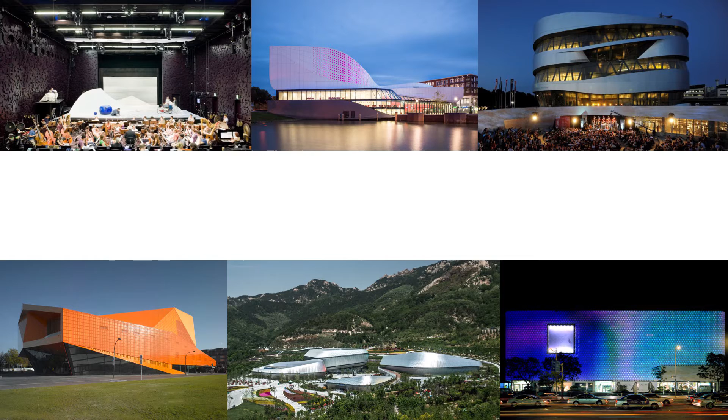So we are not strictly speaking airport planners, and most of you might know UNStudio from our cultural projects, most notably the Mercedes-Benz Museum, which you see up here.

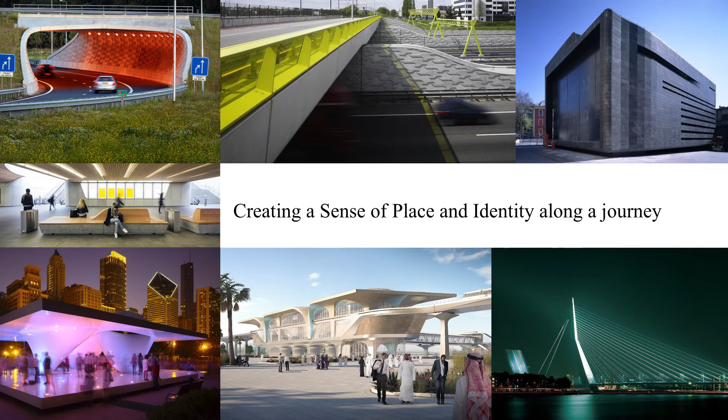But nevertheless, there has always been a keen interest in infrastructural projects in the office, and we always like the idea to take something that is considered more ordinary and turn it into something extraordinary. And by that, creating a sense of place and identity along an everyday journey.

This also changes how you perceive a city, and this ranges from a transformer substation in the city of Innsbruck that was built like a public sculpture, all the way to highway underpasses, then to bigger projects like the bridge in Rotterdam or railway stations that really change how you read a city and how a city identifies itself.

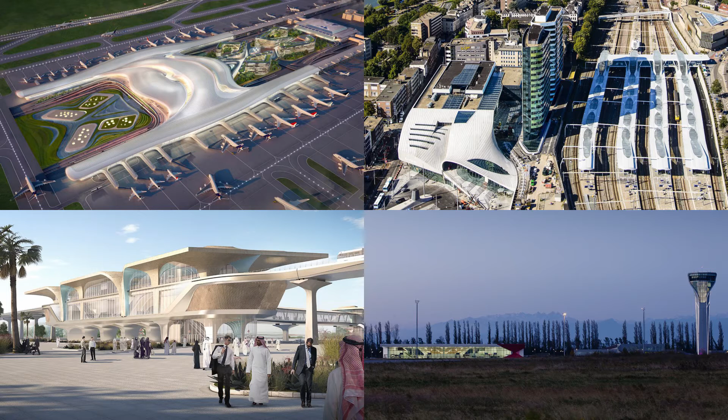In the following, I would like to look more closely into 4 projects, and would like to explain how we see user-centric design as part of our work, and the methodologies we employ at UNStudio.

The 4 projects are not only airports, so I want to widen up the discussion a bit into transport buildings. I would like to talk about Arnhem Central Station, the Qatar Integrated Railway Project, the Taiwan Airport Terminal 3, and Kutaisi International Airport.

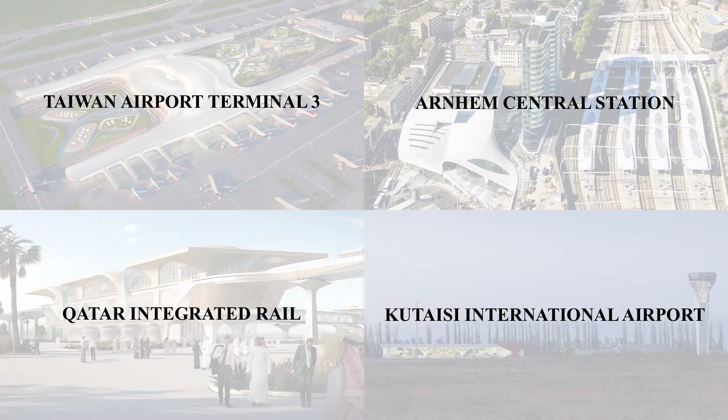So, designing a user-centric environment.

And the spaces built around this act of traveling really catered to this aspiration. They were very romantic, spectacular, and created memorable moments.

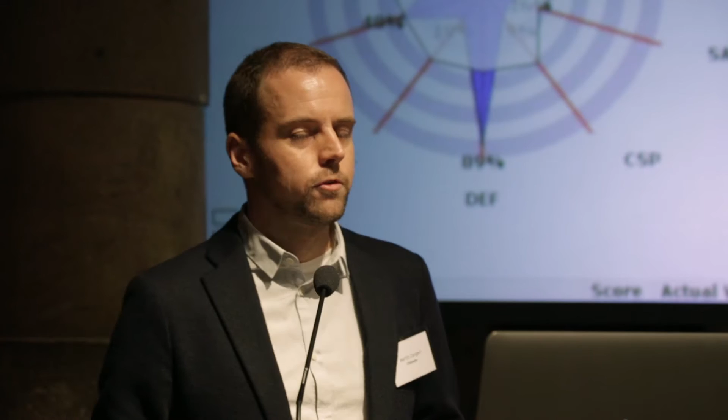And this misalignment might very well come from the fact that different parties involved in airport planning and operating try to optimize and try to be very efficient in their own field, but maybe without looking too much at what others are doing.

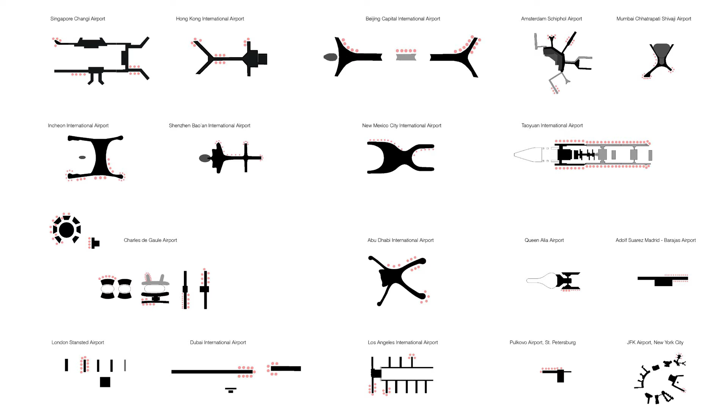Moreover, as we learned, there's an increase in passengers every year, which really affects airport planning. There are factors like size, capacity, movement rates, security areas, concessions, and so on that change with that peaking of passengers.

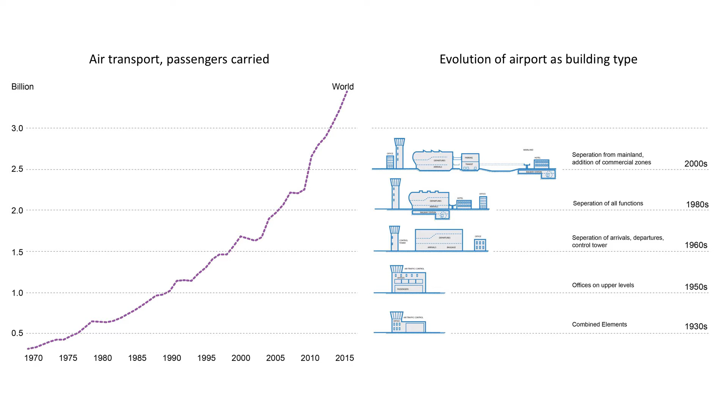So I know my numbers are not quite correct, but the graph might look like this. There's a really steep increase of passengers throughout the years, and it also affects how the airport typology changes over time. It went from something that is very small and compact and integrated into city-like areas, which are complex and very difficult to navigate.

We really believe that the difference comes from focusing on user groups and developing our design from there. We'd like to shift to a process that is more bottom-up than top-down, putting the human scale in the center. We believe this leads to a more socially sustainable and environmentally friendly way of traveling.

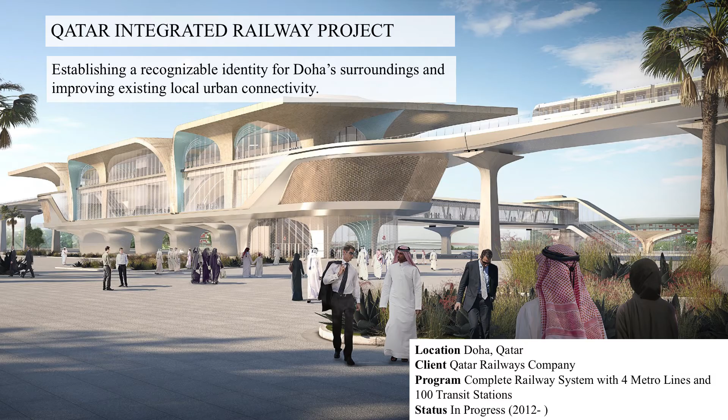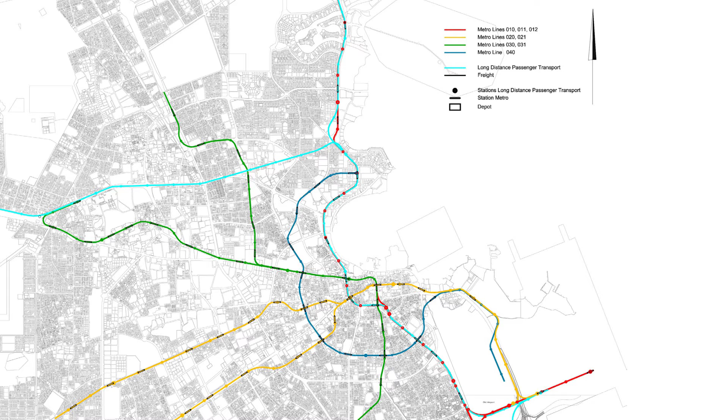The challenge in this project was that we had to design each line and every station along each line at the same time—around 100 stations, all done at once. So the question was, how can you give identity and a unique sense of place to something growing so quickly?

What we tried to do is avoid repetition and doing the same thing over and over. The solution for us was to structure the task into families of identities, meaning each station gets looked at from three different levels.

There's the location of the individual station itself in the city, which changes and is unique everywhere. But then, how does this station relate to the line it's situated in? So it's part of the red line, the blue line, and so forth.

And the next level is, how do all of these stations make up a character that is unique for Doha and represents the metro line company?

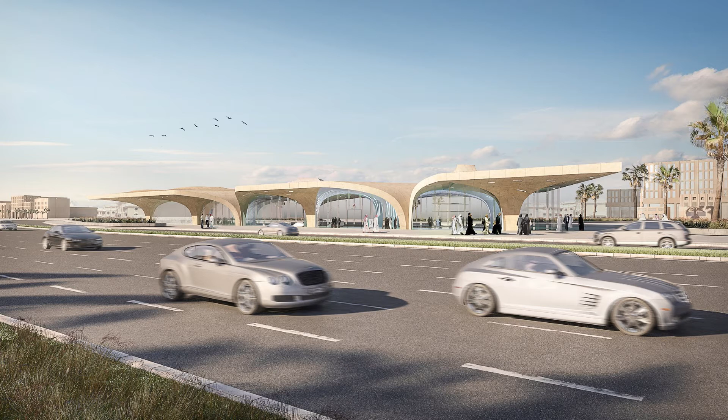What we did is start by creating an architectural language that reaches across all these scales and acts as a backbone. You see we borrowed from traditional Arabic architectural elements.

You see these arching walls, but also we tried to react to the local environment with large cantilevering roofs providing shade, and very massive roofs to keep the heat out. What you see here is what we call a pop-up shelter next to a busy road—you would enter there and then go down to find your train.

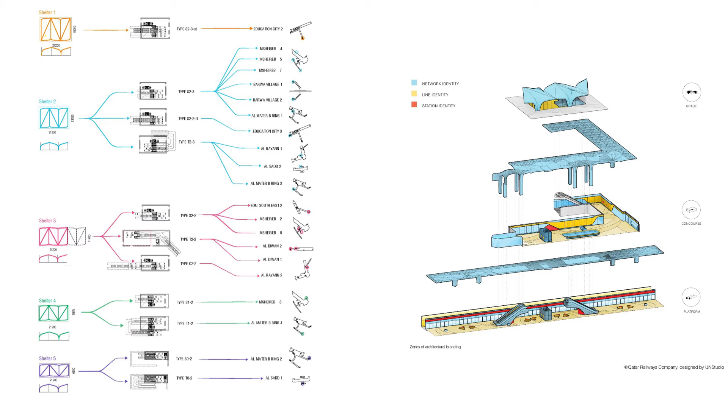By creating this language, we took great care to allow enough flexibility and variation, so we can cater to each unique situation we might encounter within the city.

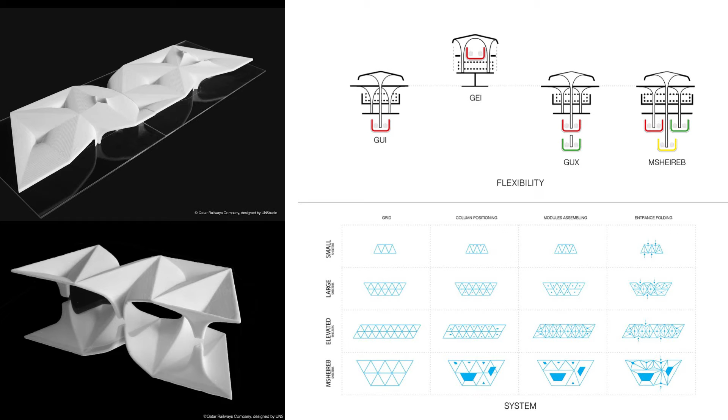What we did is create these folded panels you can see here. By combining these panels, we can build up different situations for underground stations, for shelters, for elevated stations. This almost geometric tool set allowed us to control scale, light, and—very importantly—shading in this area, while also guiding people.

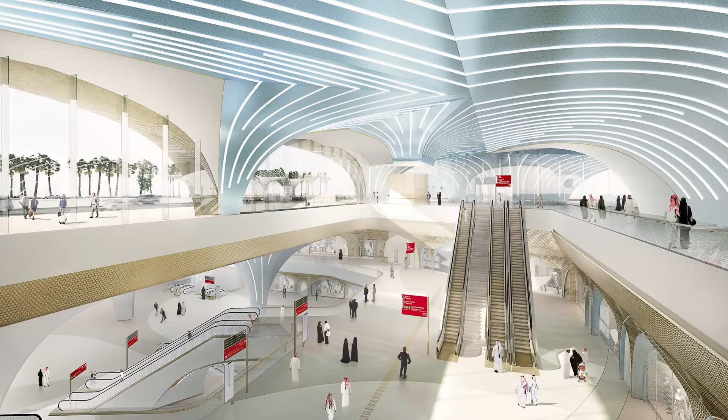And this is the station you have seen before. When you enter, you would go down and find your train.

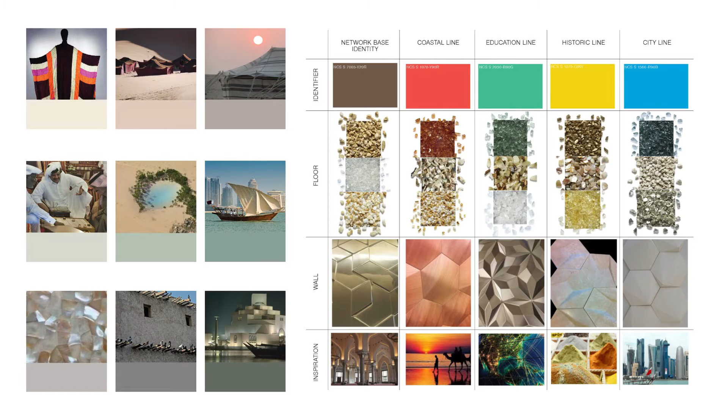But as we progressed on this project, we soon realized that to make a journey very tangible, you need to go to a different scale—areas that are closer to the user. So we started looking at the surfaces very close to you and investigated an abundant use of materials, quite unusual for stations.

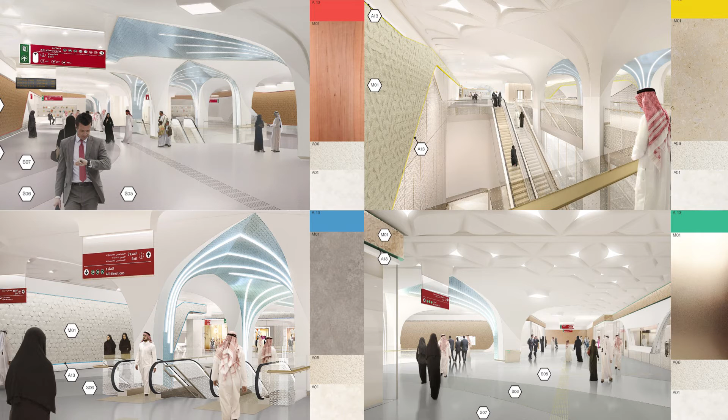Traditionally, you would have bold colors all over—your red line, your blue line—running throughout all the lines and stations. But we tried to flip this around and put materials in the foreground, working with the material properties and textures that occur naturally in these materials.

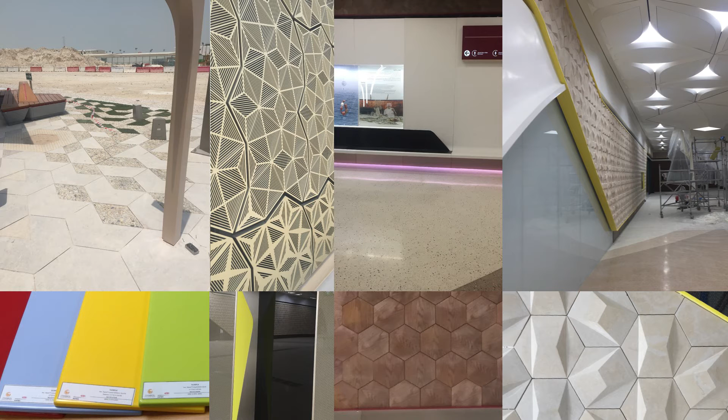So you see here, you still have your red, but the red line is very much defined by the wood material. Or the yellow line, where we use natural stone cut in a certain pattern.

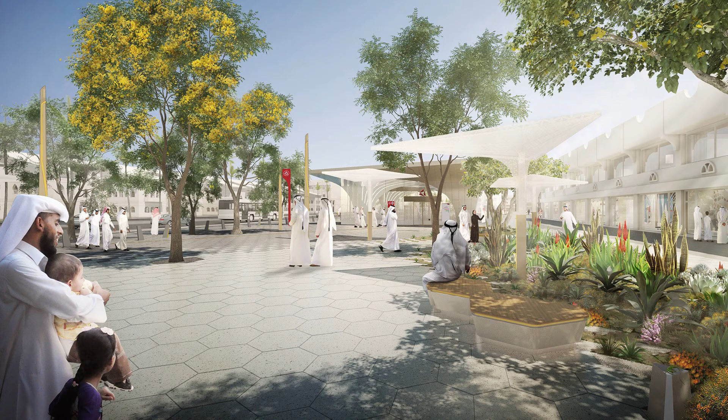We really think that by this, you can create a more friendly and pleasing environment while traveling throughout the city. To sum up this project, I think this image really captures what we were after—we believe architecture should act as a background to activities that can happen in the city, creating a sequence of spaces that let you experience the city along the way.

The quest to create more than just another train station or piece of infrastructure really relates back to this project, the Arnhem Central Station. It was completed last year and was in the office for the last 20 years.

In many ways this project acts as a model for how UNStudio works, and also for a model of what a train station can be. It turned out to be an intermodal hub that is a catalyst for the city of Arnhem, but also connects the city to the region of Gelderland, where it's situated, and to the wider geographic context.

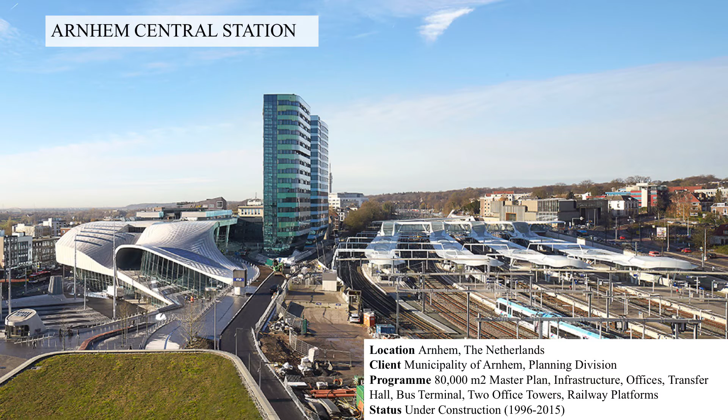Just to explain what you see: you have the main hall here on the left with the bus gates, office program here in the middle with auxiliary program, and then here the train tracks and the roofs.

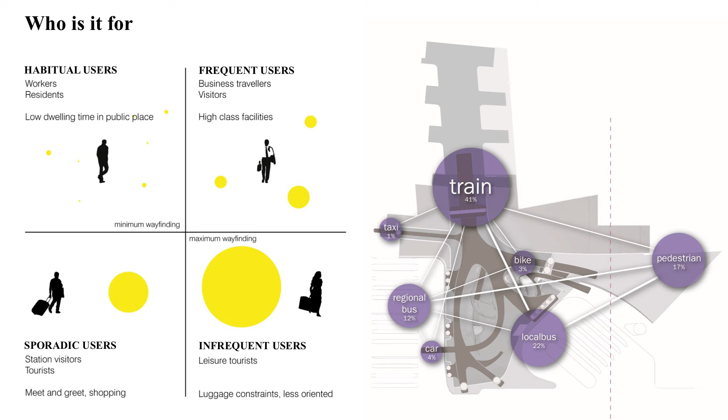This design really came about by the question: who is it for? We put the user at the core, really at the core of the consideration, and it helped us come up with something completely new. It also confirmed that the station is heavily used for travelers, but there's also a big amount of people who don't necessarily use it just for stepping onto the train.

So what we did is we took what you have in a station in abundance, movement and people walking around, and we tried to embrace this movement.

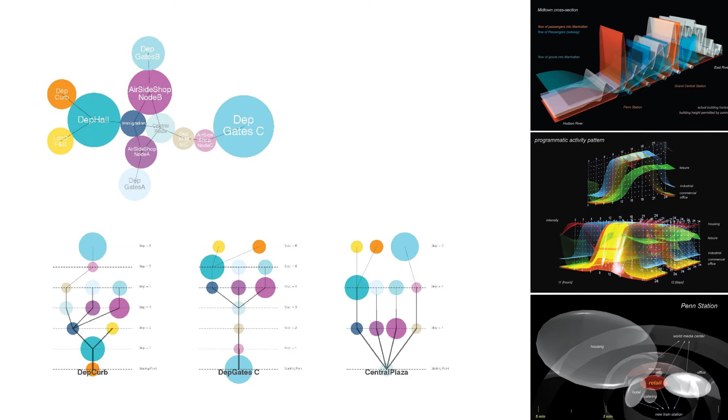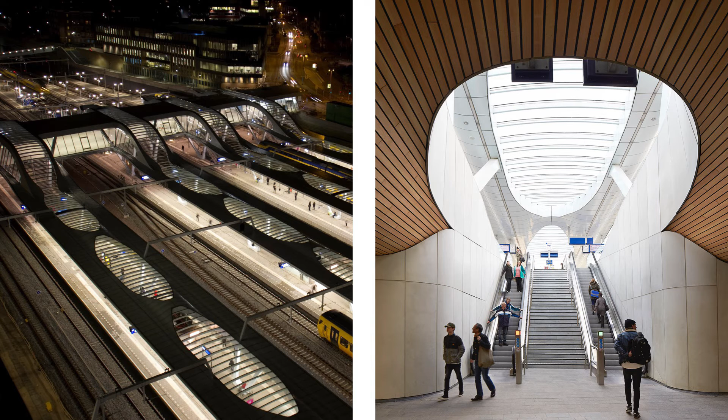In the beginning, what we always do is work with tools like this, where we start to map connections, try different scenarios, and really find the fittest of these scenarios in order to minimize decision points, level changes, and so on. We take layouts and virtually simulate the journey you go along, trying to negotiate between different destination points. In the end, we really see that architecture becomes the guide that navigates between these movement patterns we recognized in the step before.

Here you see the architectural gesture of how you come up to the station, to the tracks. You have light coming down. We are really after creating these beacons of orientation that confirm you along your way.

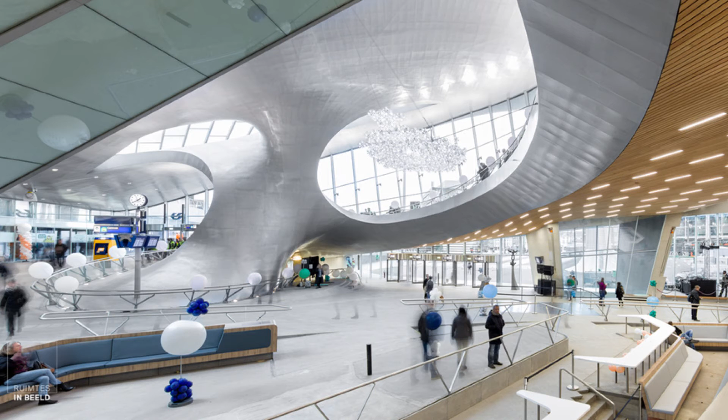This is a view into the central hall. When we look at it, we of course like the form, but it's not only the form we like—it's also a manifestation of the movement. This form really comes about from all these patterns, and we try to negotiate between these movement patterns.

So you have this long arching ramp that goes down from level 1, connecting the platforms to level 0, where you come with the buses and walk in. Then it ramps down even further in a gentle motion to the parking garage, where you come with your car, or to the bike parking facilities, which is a big thing in the Netherlands.

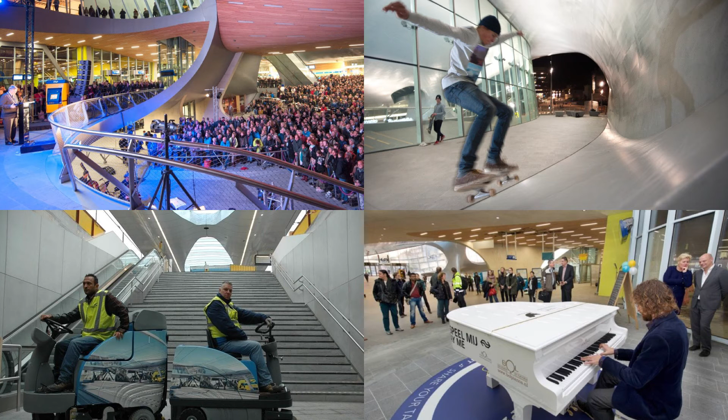There was a lot of doubt while realizing this project, but you can really see that it works when you see how people use it in unexpected ways. They make it theirs by coming up with different ways of having fun in the space, really making it personal along their journey.

Now I'm getting into airports. The airport we did, which is a realized project, is quite a small airport. But sometimes you have small projects, and in small projects you can see very well what the intention is—you can read really clearly what we are after.

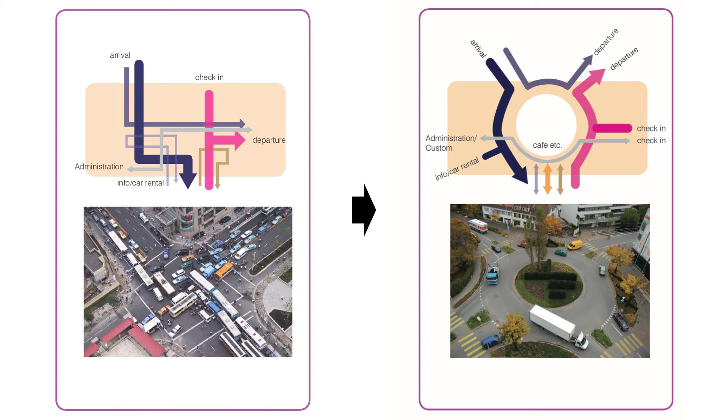It has a small capacity, nevertheless there's a national and an international separation. Everything is organized on the same level, and I think this image talks for itself. We have arrival and departure on the same level, but what we are after is quite similar as what we did in Arnhem. We are after a model of movement.

So we try to come from something that is very complex, but very inefficient and crossing, to something that is as simple as a roundabout.

And again, we use tools. We always go back to a tool set. And one of these items in the tool set is called the deep planning approach. So we start with analyzing spatial requirements, mapping out connections, physical connections, visual connections, connections with light, green.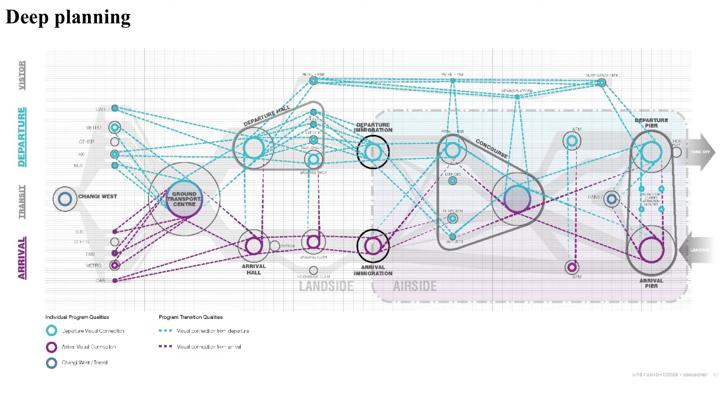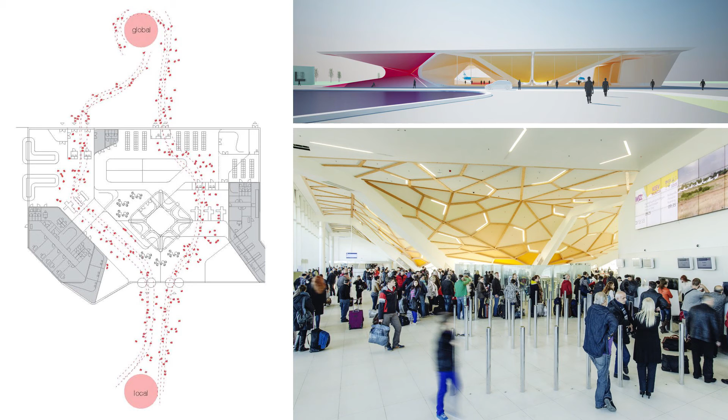We try this analytic approach to discover underlying key factors. And in this case, the key driver that drove the organization of this building is the folding roof and the courtyard that really is at the center of the building and acts as a beacon of orientation. And departures and arrivals is oriented around that central space that lets light in and has a very strong imprint.

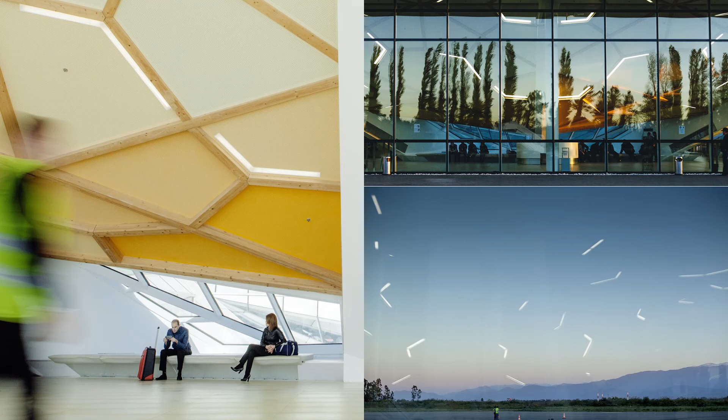And we really hope that by creating these moments that have this strong character, you start to take this picture with you along your journey, and it starts to create a memorizable place.

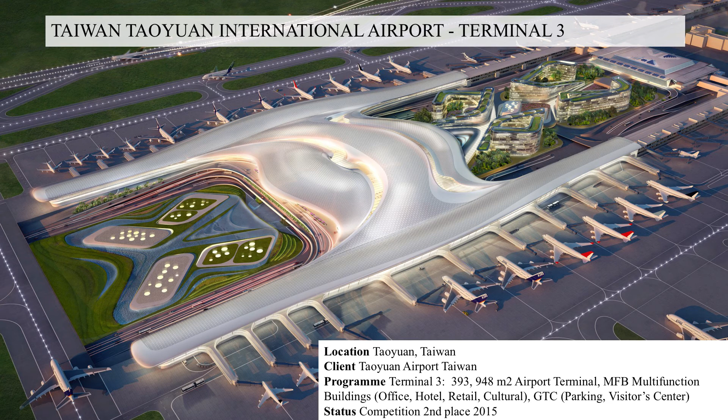So I'm finishing up now with the project that we did recently. This was a competition entry for the Taiwan International Airport. It's an extension to two existing terminals, and it is a head house with a capacity of 45 million passengers per year that can be processed in there.

And our design got second after Rogers, but we took away very positive feedback, not only from the client, but also from the jury, and even the public was very in favor of this. And it confirmed us that we are after something that might be worth taking on.

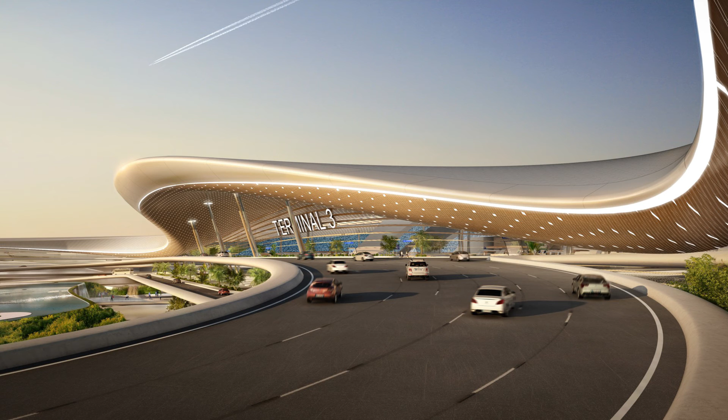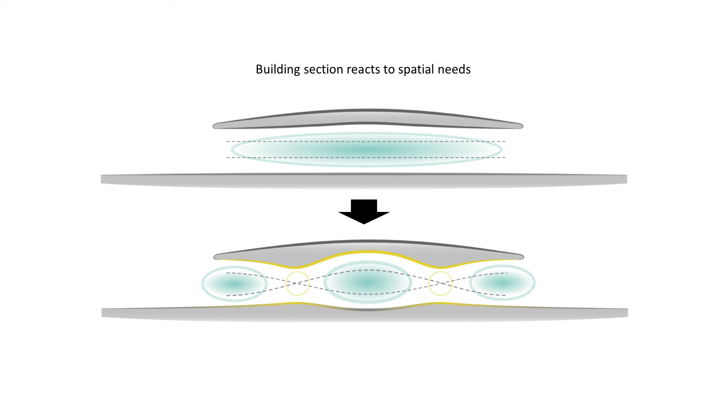We try to break with an airport typology that relies on an excessive and monotonous use of space, but try to really focus on the scale of the user. And how we did that is by adapting the building volume and changing the scale that is emotionally and functionally needed.

And by that, coming away from a big hall, but to something that is more like a link of a chain of events. So you have different sorts of experiential spheres that are linked together.

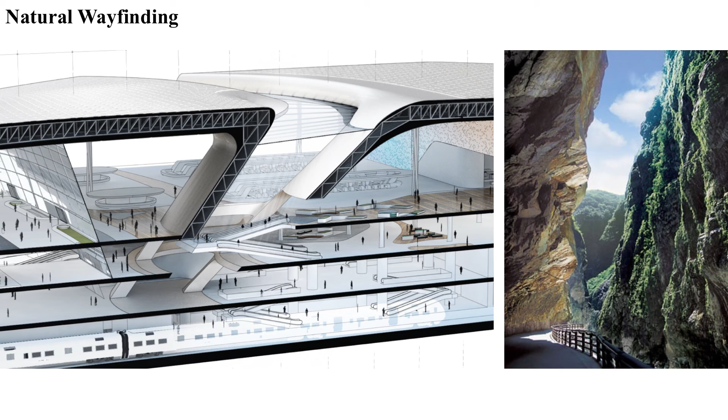And this is an example where the roof dips down. It's funneling natural daylight across the departure arrivals hall down into the MRT station, and it acts as a natural wayfinding beacon and connects all these different modalities.

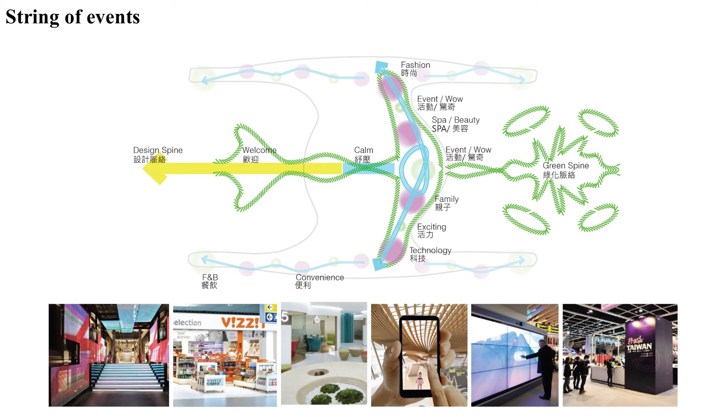And as said, we were after a curated chain of memorable events. So when you pass through this building from departure to your gate, you go along these different spaces that we set up.

It's almost like walking through Venice. You go through one piazza to the next, and hopefully you don't get as lost as in Venice. But it's the feeling that you have these very intimate spaces.

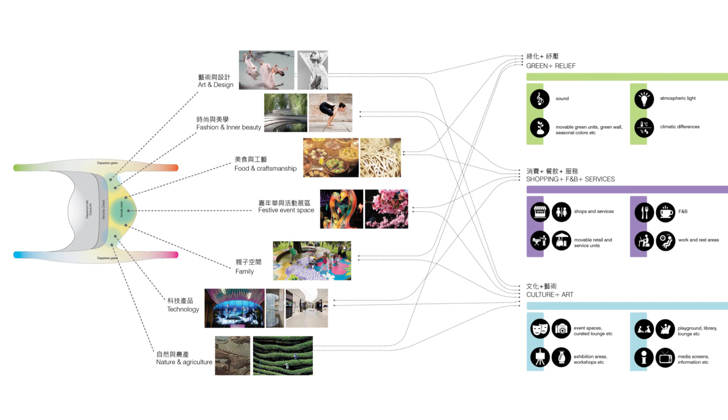That you're going through. So for each link in this chain, we introduced soft building blocks, as we call them. And they comprise of green, of shopping and services, and culture and art. And we scaled these components to what we thought emotionally needed and also functionally needed.

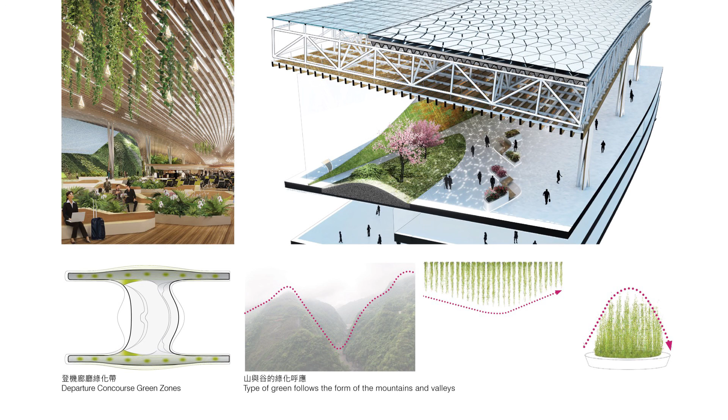And this is how one of these zones looks like. You see that it is a very natural space. We thought of them to be very relaxing, a very controlled use of daylight, controlled humidity, very controlled temperature, everything that is close to the five senses.

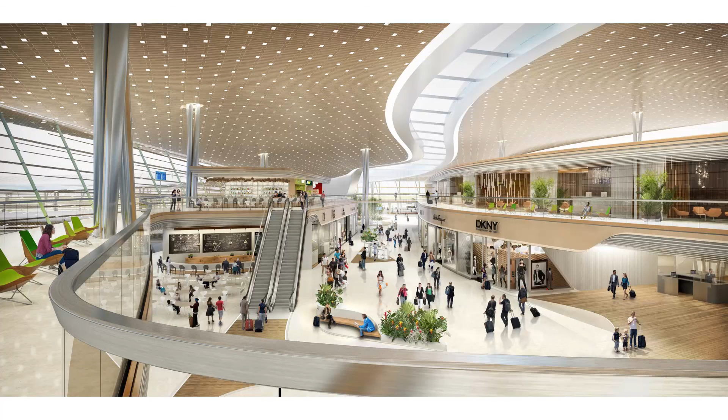This is looking along the departure pier. And really what we're after is to make a journey more personal.

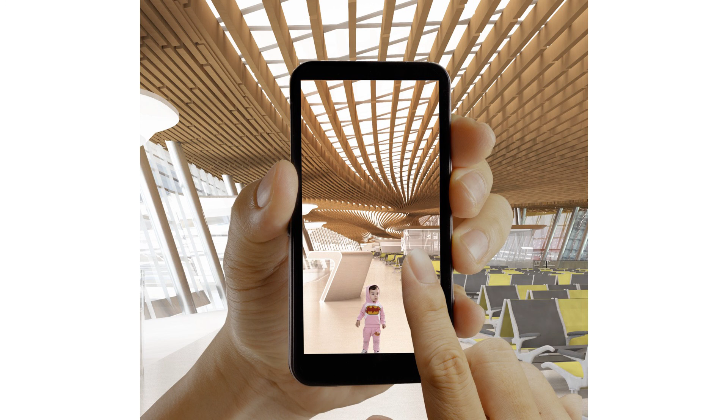And we've heard in previous talks that there is a lot of tech out there, and technology that is very close to you, and it's undeniably great in making your life easier, and you cannot do without. But moreover, we think if you have a well thought through architectural design, it really allows you to connect to the user and helps them navigate through these spaces in a more natural way and moreover in an unaided way. Thank you.